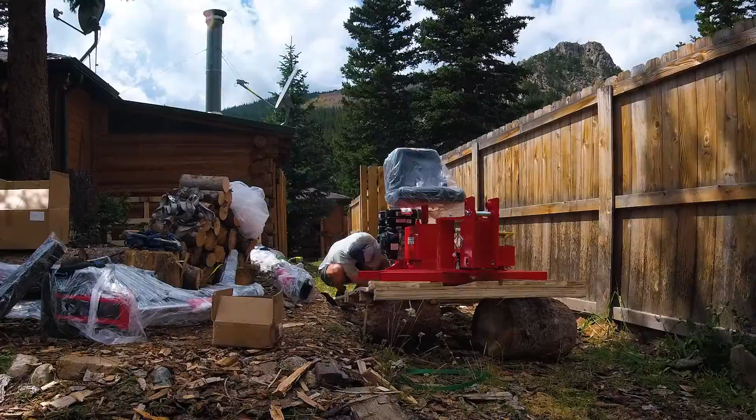It is a chilly September morning, but it is a good one because we finally have the backhoe. It came to my house a few weeks ago and I got it put together pretty easy. Took a couple hours and got it out here. It fit perfectly on my trailer, which is a 5x10. And then got it off yesterday afternoon. Had to do some stuff last night, but now we're ready to go.

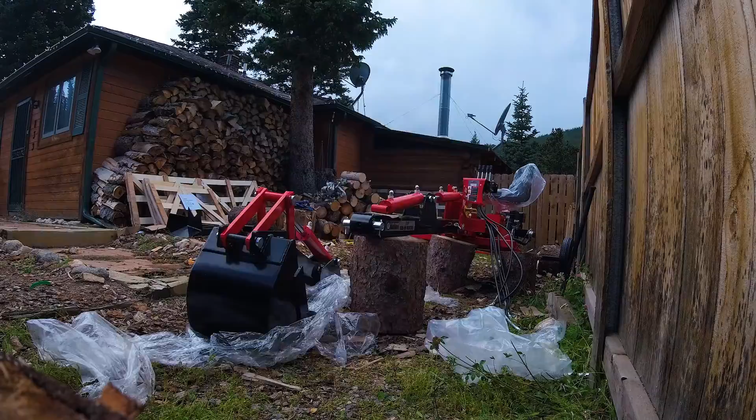So necessary tasks are the excavations for the septic inspection and getting the house kind of started. I won't be able to get concrete in there just yet because I'm going to need to wait for the septic permit before they'll issue the construction permit to do that. But let's find out what this little thing can do.

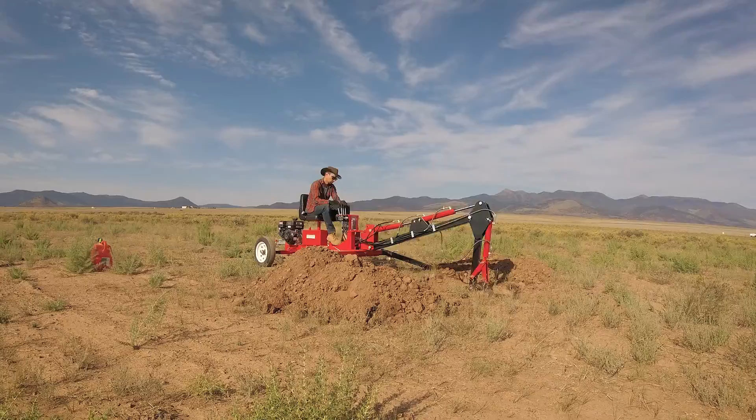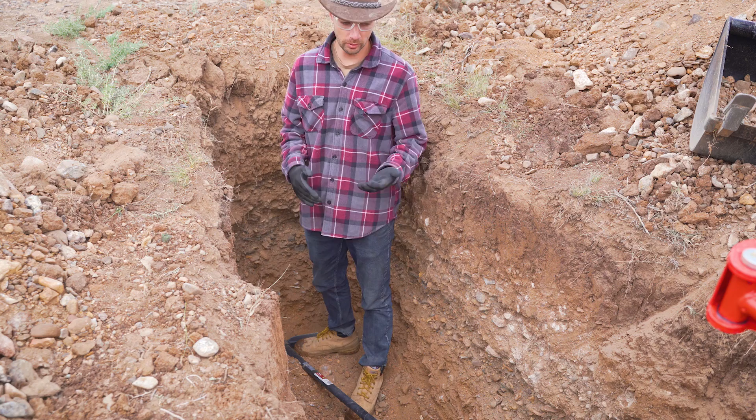All right, so this is the part I considered not showing you guys. I went into it knowing that one of these excavations had to be 8 feet deep, and I know that the maximum depth stated on this backhoe is 7 feet. So I was always thinking that I would just hand dig this last foot and it would be an off-camera thing. But turns out, what they don't tell you, 7 feet on the spec sheet is about 5 feet in reality. It's just simple math with the angle of it that the teeth don't dig in anymore once you get below a certain depth. So although it can reach down, you can't actually cut into anything.

So I'm about 5 feet now and I'm gonna have to dig the remaining 3 feet with this pick mattock. I've got a digging bar, but the pick mattock is a little easier to swing. And then I'm just gonna collect the dirt, scoop it out with the bucket until that no longer works, and then I will shovel it out. But just proof I'm earning my keep around here.

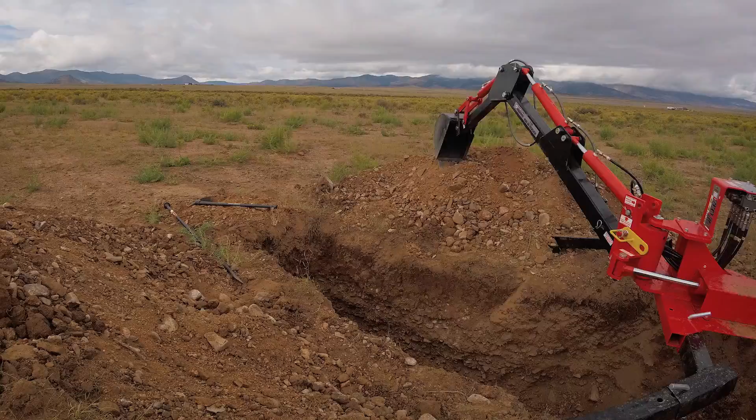All right, and here it is. An 8 foot deep hole. You can see the bottom of that. But it actually was pretty much all the Harbor Freight trencher. I found that you can take these outriggers, and if you swap the left and the right one, they point up, which allowed it to kind of cradle into the sides of the pit, and I could get way deeper.

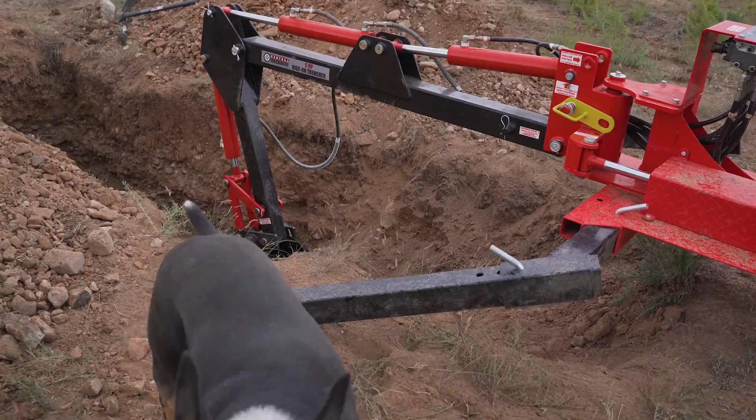So even though this thing says it goes to 7 foot, it really doesn't unless you do that, and then it pretty much just about gets to 8 feet. It does work pretty well. It looks like a toy, but it certainly digs like the real thing.

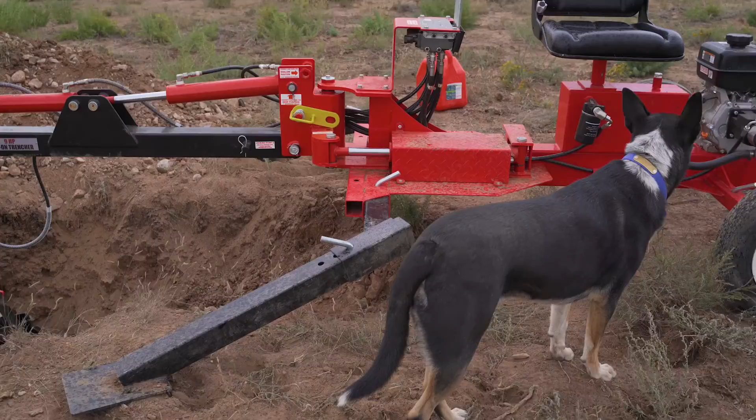All right, so a week has passed since that last time lapse, and these pits have now been inspected, and I'm just waiting back for the engineering on that, and that'll be tied along with the permit for septic and for the house. You can see that the aspens have started to change up on the mountainside, which is great. It was hard to know exactly where they were until they revealed themselves now.

The trade-off with that is that some freezing temps are definitely coming our way, so I really need to get cracking on getting these footings dug. 30 inches is going to be the depth below grade, and we're going to go and do that, set the rebar, and then have it poured. So yeah, let's get stuck into it.

Okay, so here's our footings and our foundation walls marked out. 16-inch wide footings, and we're going to have one isolated footing in the middle here, which is going to be 2x2. And then I've used the string lines to mark from diagonals, which will give me the center, and then of course around the perimeter, and coming in 16 inches on all sides.

Now I just have to dig it out before it rains again, but thankfully there's only a few clouds all the way out there, so let's see what we can do.

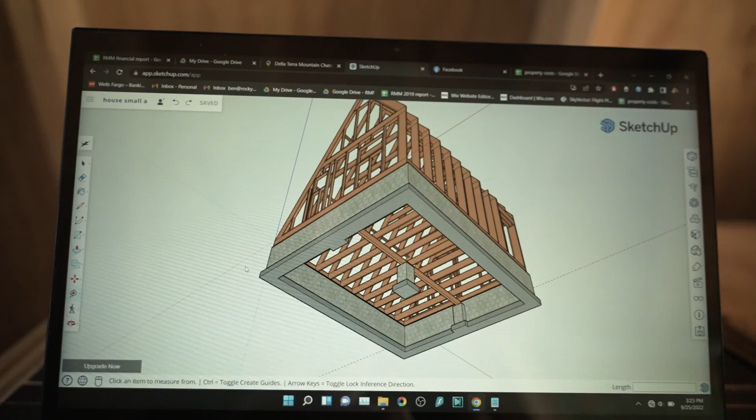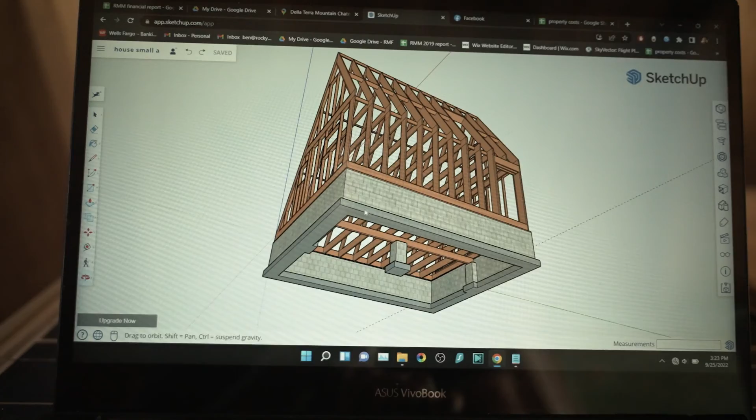Now, one other thing worth noting is that I've brought along my 3D model this time, my laptop, so I'm able to completely visualize and take any measurements I need. You can get a bit of a look of how this is going to be in the end. A 5-high block wall, and then a concrete solid 16 by 8 footing on the bottom.

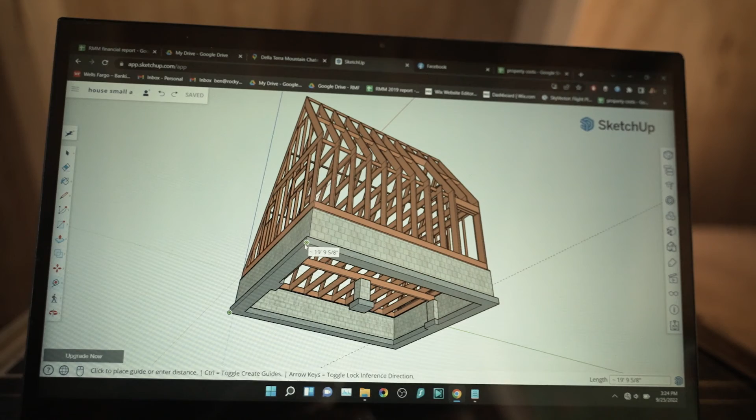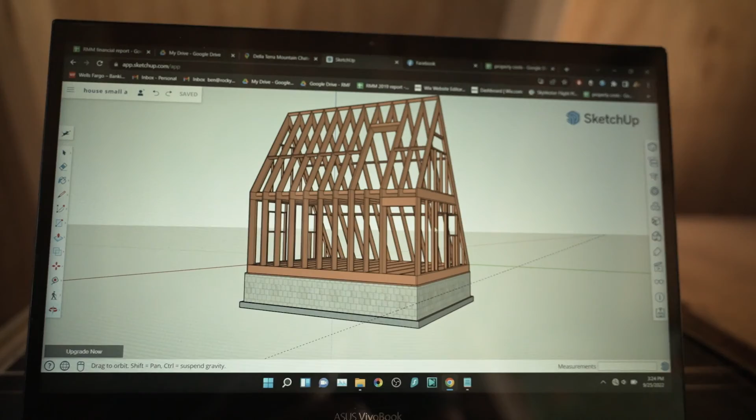It's kind of how I like to do it, to visualize everything beforehand and to make sure I don't make any mistakes. Hopefully if I make mistakes, I make them on here where I'm able to just erase those and start again. It's not quite as easy in the real world, but it gives you a bit of an idea for the shape as well of the first side of the house and how it's going to be framed up. So yeah, let's go get digging.

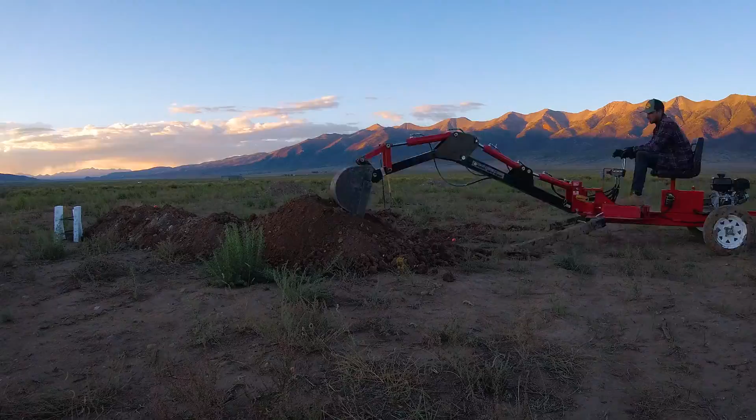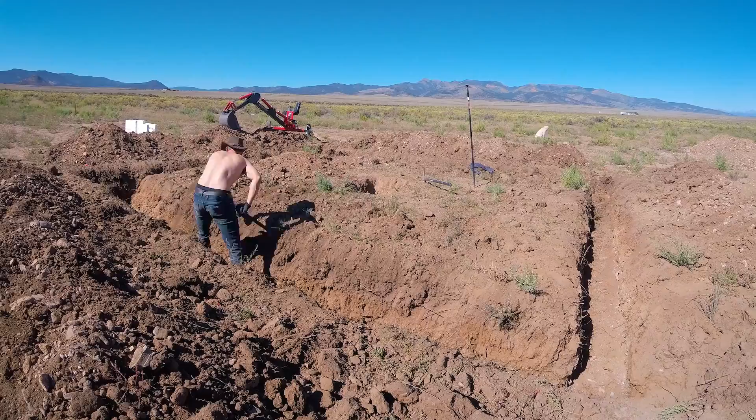All right, so now the hole's pretty much dug, so we're gonna go ahead and work out where the bottom is, make sure they're all roughly at the same level. It doesn't matter if the concrete is a little thicker in some spots. I'm gonna order more of it anyway than what I think I'm gonna need. We're gonna use the Trimble Spectra Precision Laser to do that, and then what we're gonna do more accurately is put in pegs to mark where the top of the concrete needs to be. That way, when we set our foundation wall, it's all gonna be on the same plane.

And after that, we can put our pegs in. I will need to do a bit of a remeasure to work out where the corners are going to be of the foundation wall, not the footing, just to make sure that those fall within the walls. You can get a little off here and there. I did my best to mark it out where I cut it, but let's just make sure that we're in the right areas, and then we're pretty much gonna set the rebar and put the verticals in, bend them up, and then we're ready for concrete.

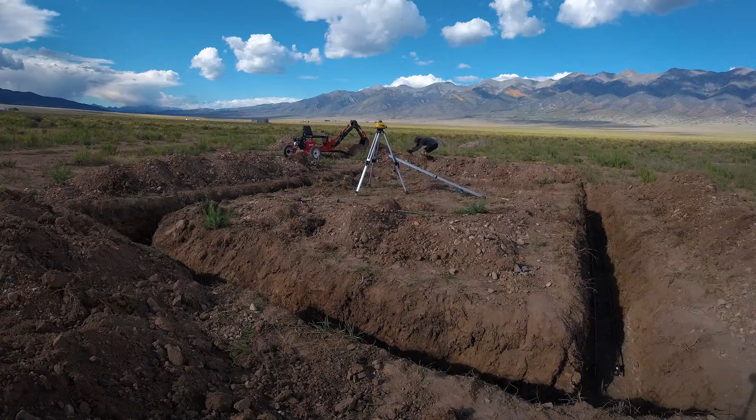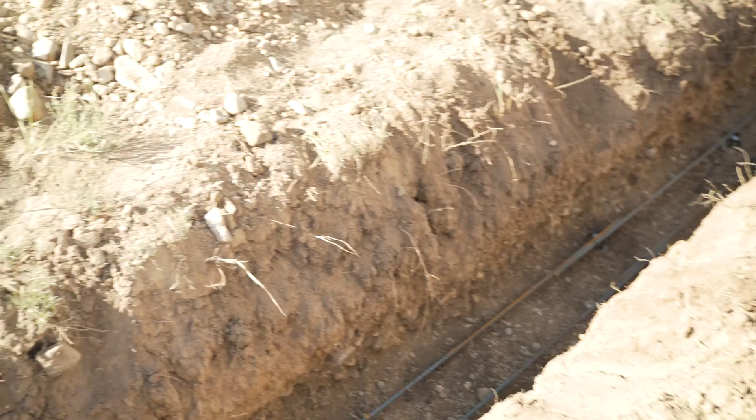All right, so the sun's just about down and we've got our rebar in, so that'll mark the end of our digging, preparing the footing video. And you can see we've got them sitting up on chairs. We've got the pegs in that are going to show us the top of the footing height all the way along, every 4 feet. And then I think I'm going to wet set the verticals. I haven't made my mind up on that yet, but I'll do that just before the truck comes, which hopefully will be next week.